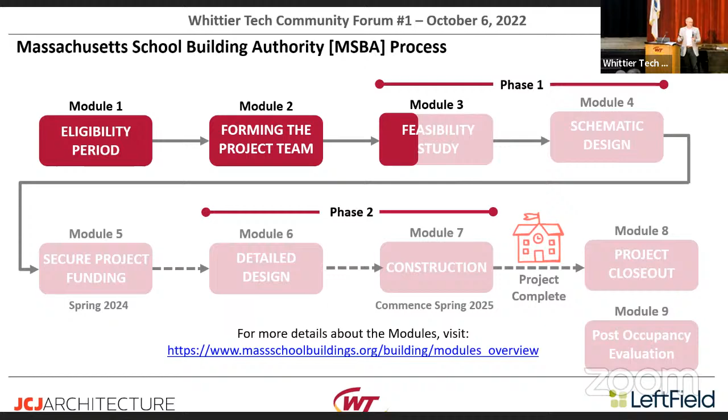From a milestone standpoint, you can see Maureen indicated that there's been 5 years of submissions, applications to the MSBA. I can tell you that some school districts have submitted 10 years of applications, some have submitted 15, and they have never been invited in. Just to be invited into the MSBA pipeline process is a gift.

The forming of the project team happened earlier this year. We are here, about 2 to 3 weeks away from submitting the preliminary design program. We will then be moving forward into the preferred schematic report, a robust schematic design. At the conclusion of the schematic design, we will know the scope, the solution, the schedule, and the cost.

And then for our third graphic, which apologies that a lot of this is very duplicative, but we know that everyone sees things through a different lens and a different vision, we wanted to show the timeline in a conventional calendar format.

So the first phase, which we are in, is the preliminary design program. We're a couple weeks away from submitting this to the MSBA. We will then move forward into focusing the solutions down to one. That will happen at the conclusion of the preferred schematic report, a robust schematic design, with approvals within the 11 member communities, and then, depending on the solution, we will work forward to breaking ground.

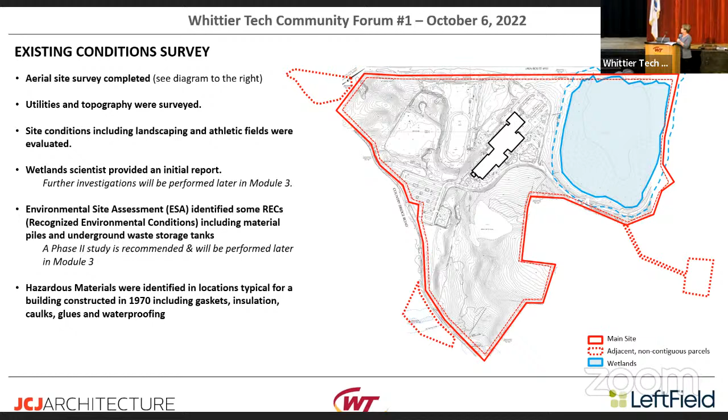So these are the plans that we developed, and these will be used as the baseline for the design options that will be talked about later in the presentation.

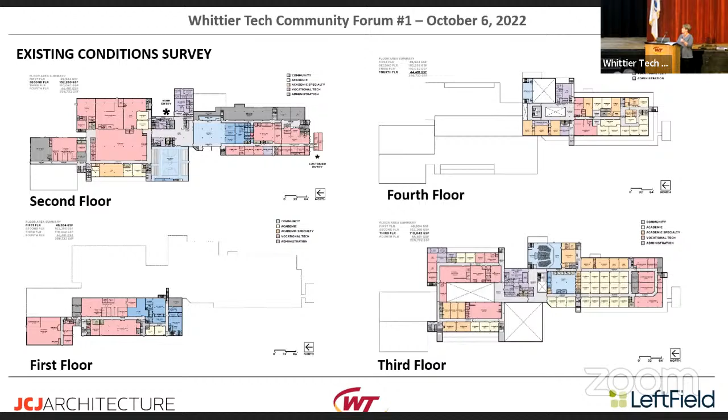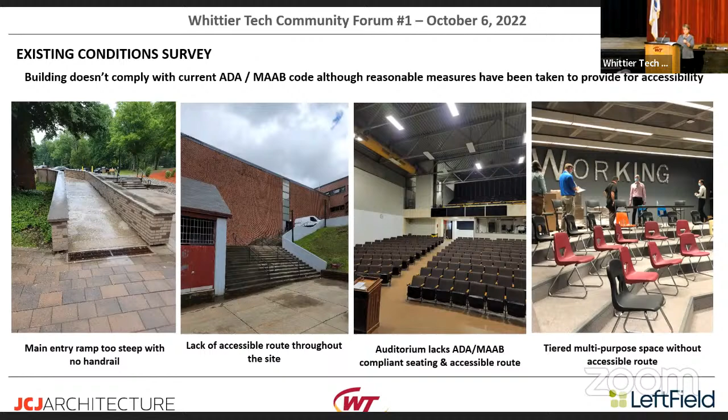The existing site and building has conditions that do not comply with current accessibility codes for either the Massachusetts Accessibility Code or the National ADA Code. In spite of that, the school has done a great job making reasonable accommodations to provide accessibility. These photos indicate some existing non-compliant conditions in both the site and the building. One of them is in this auditorium we're in right now, we don't have an accessible route or accessible seating that meets current codes.

The exterior envelope, the brick, needs repair and cleaning, and also isn't comprised of a composition that meets current energy codes. Other examples include several areas in the building comprised of connected stories without the fire separation and smoke separation required in current building codes. Another example is that the wire glass in the building is not impact resistant per current code.

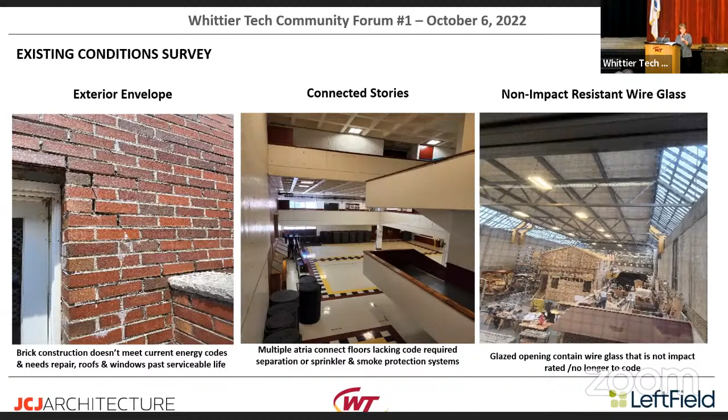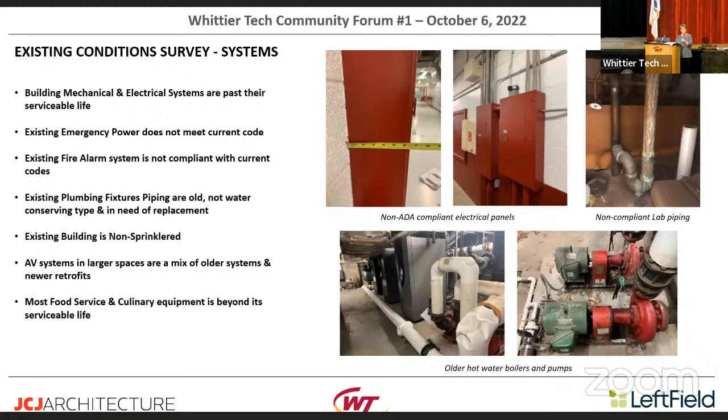There are also daylighting challenges, with many internal classrooms, both academic and vocational, lacking natural daylight. The systems here are old and tired and need replacement, the heating, plumbing, electrical, none of these meet current codes. Another big issue is the lack of a sprinkler system required under current code. Finally, besides the technical issues, these buildings don't meet the energy code and are inefficient and costly to run.

Thanks, Alicia. My name is Jim LaPosta with JCJ Architecture. I'm a design principal. We're going to spend the rest of the presentation talking about how we get from understanding the conditions here, which we've discussed, to what the vision for the future might be, and what could eventually be a new or renovated school.

As Doug mentioned, one of the things fundamental to this entire process for the MSBA is that this project, whatever is built, ultimately fulfills the educational mission of the district. So they require an educational plan.

To do an educational plan, it's important that we hold a series of listening or visioning events, which we've done over the summer. There were a series of workshops held with an educational consultant who was part of our team, David Stephen. He's a former vocational tech teacher as well as an architect.

Then we had meetings with large groups. Almost all of these were held online, as our world is nowadays. Ultimately, the last one was an in-person teacher workshop that we held here on site, just before, I think it was the day before school opened.

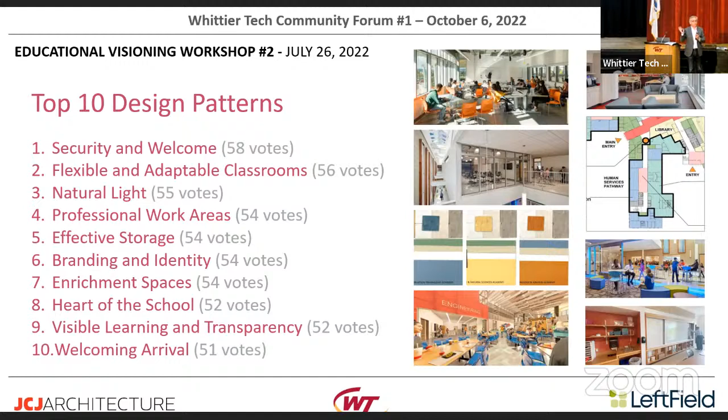So these were really the top 10 out of probably 40 or 50 different patterns that were looked at, discussed, and voted on. This isn't the final be-all and end-all, but it's a way to help inform the building design as it moves forward.

There are things that I think the best one was: we're Whittier Tech. This is a special place, and we need to hang on to what's special about Whittier Tech as we go through this process. This isn't any other building, any other place, so we need to make sure we don't lose sight of that. Thinking and doing is how students learn here.

We want to create spaces that are important in that way, that support that mission. Adaptable, flexible evolution — we talked about how education is going to change, and the new or renovated building has to accommodate that.

We want to focus on career pathways. That's what this place is all about, making sure students are career and college ready when they leave. A heart of the school we talked about — some place where, when you arrive, you feel like you've actually arrived at the building, and to give a center, like a community square for the school.

Indoor-outdoor connections — you've got a beautiful site here, lots of opportunity for outdoor learning, lots of opportunity for working outside, trades work outside. Maybe we could think about ways to enhance that learning environment using the site. And then finally, school is a community resource.

For the 11 communities that are here, how can we make sure that this building functions in a way that supports all 11 communities and gives access to and support for functions that may be needed?

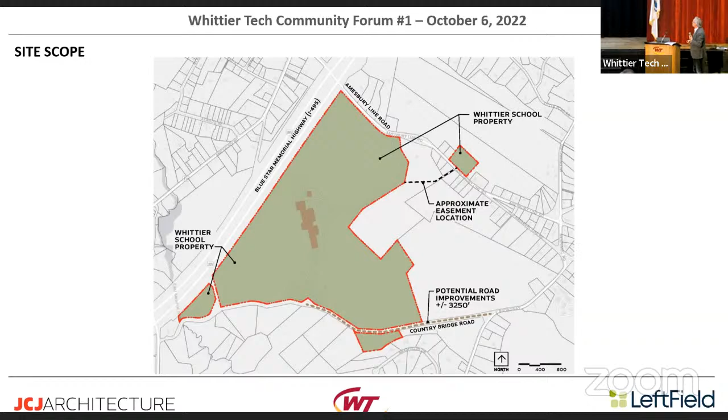All of that has to get applied to your site. So as we begin to look at that, this is the property again in terms of the site scope. It's pretty big, so you'd think there's a lot of places to build. This should be pretty easy.

But when you begin to analyze it, you find there are some limitations on the site, and that's what we're going to talk about. To start with, the way the site currently works, there are lots of traffic issues. I'm not telling you anything you don't already know if you come to the site regularly. Parking issues, traffic issues, issues of how you get in and out of the site.

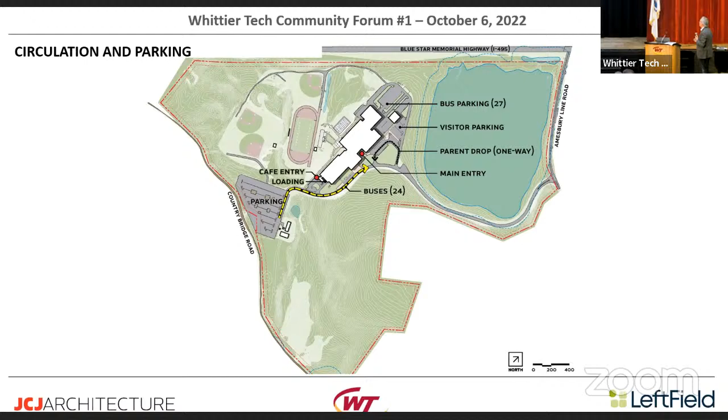But more importantly for the construction project, you've got a lot of hills here, a lot of topography. One of the things about a building project is if you can stay away from the hills, you're going to save money. So we want to analyze the most buildable sites on the campus, either for an addition or for new construction. This gives you some idea of the slope you have.

So this just gives you some idea. There's a 90-foot grade change in this part of the site, 130 feet from top to bottom. It's pretty level over where the ball fields are, relatively level where the school currently is. There's a 40-foot depression here and a 40-foot hill here. So there's lots of interesting things going on.

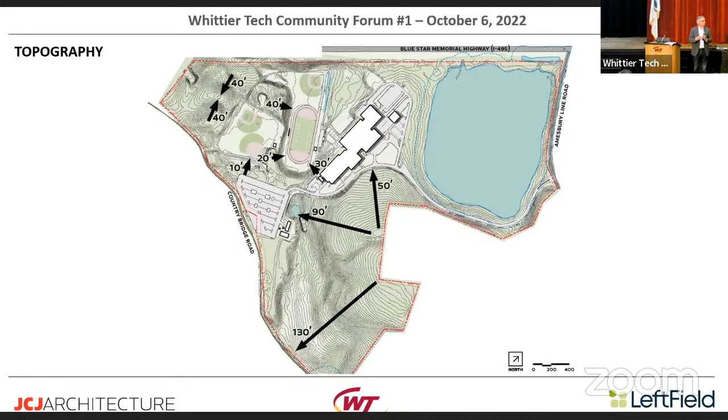We can build anywhere, but it costs money and it takes time. So how do you do this in the most efficient way so that we're maximizing the taxpayer dollars and making a really good school? So we started to look at things like buildable area.

The areas in yellow really are those areas that would be the most cost effective to build on and really the easiest to build on. The orange is somewhere in between. Everything else is either very hilly or a wetland. So while there's a lot of acreage here and it's really beautiful, there isn't necessarily a whole lot of room to put a big building and a lot of parking.

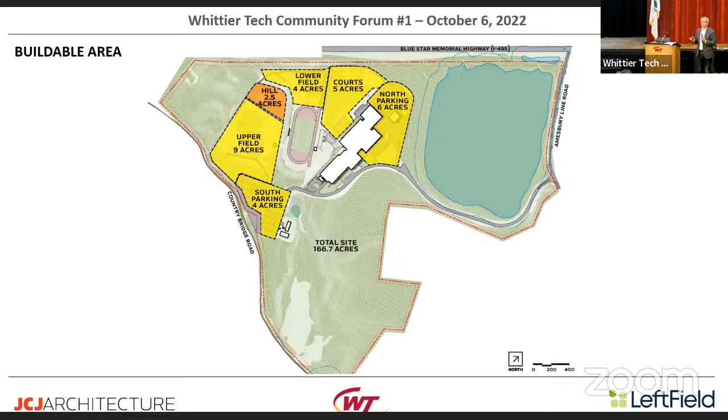So we need to make sure we look at a variety of options, and that's what this is about. As Doug talked about, the MSBA has a very good process—in fact, better than almost any other state in the country—for going through options and making sure you've uncovered everything, really evaluated all the options. Do they meet the educational program? Can they be built? What's the schedule? What are they going to cost? And then you can pick the best one that balances all of these.

So this is a matrix of the options that have been put forward initially. As David mentioned, we're starting with a lot of options. All of them are plausible and could be built, and we'll be narrowing these down eventually to a single option that would then be moved forward.

So the first option is a code upgrade. You'll see two lines here, 1,280 students and 1,400 students. When the district was invited into the program, they were asked to look at two different enrollments, so we'll be looking at two different enrollment options. At some point there'll be a decision made as to which of those two enrollments will move forward as well. So that's why there's kind of a matrix of options here.

So if you look at the code upgrade, this is simply taking this building, upgrading all the codes, fixing all the things that Alicia talked about. And at the end of the day, it will still only fit the 1,280 students—you can't squeeze 1,400 in here. That's why that box is gray, so that's not really an option if you want 1,400 students.

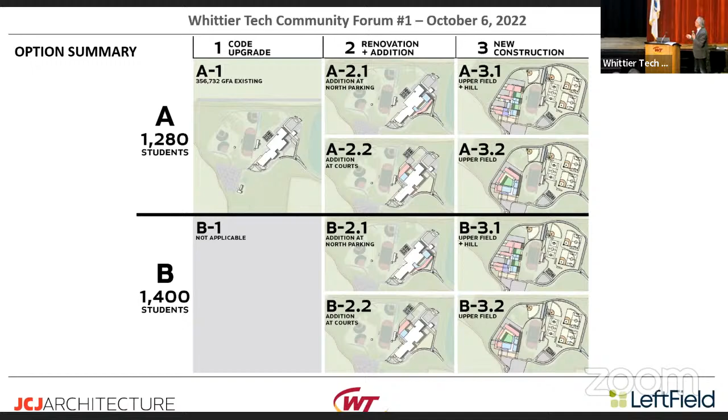You just can't fit them in the current building. When you're done, what you'll have is a code-compliant 1970s building, because you don't do anything else under this option. This is a baseline that the MSBA will be asking us to look at. Then there's a column for renovation addition—four options we'll go through in terms of where you would renovate this building and add to it in order to make it work. And then there are options for doing new construction as well.

So if we look at the first renovation addition option, what you see here on the left in all of these will be a site plan in white. That's the existing building where we are now, there's the new stadium, and the entry drive coming in from the right-hand side. On the right, this is what we call a stacking diagram, a very simple floor plan kind of exploded to show where various things might be located.

The first option for renovation addition is to build a new addition out in the front of the school. In the reddish color, you'd have a new Votech addition, a new main entry, and a new auditorium, and this existing auditorium space would be renovated into other functions. We would redo the bus drop so it comes around the right side as you drive into the site—buses to the right, parent drop off to the left. There'd be renovations to the drives and parking, and a new guard shack in this area.

Out in the back where it says future expansion—one of the things the MSBA asks us to look at is, after 50 years, where would you build the next addition? You don't want to build something now that can't ever be expanded in the future, so on all of these you'll see an area marked for future expansion. In this option, that future expansion would be off the back where the courts currently are.

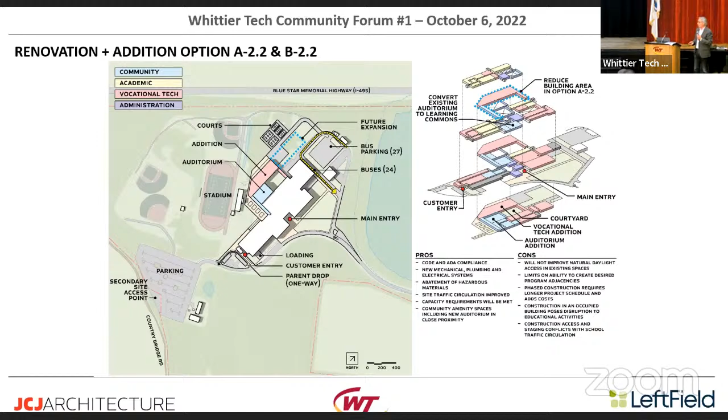The first new option to look at is to build a completely new building on the far side of the stadium—we're currently here. In this case, you would build a new either 1,280 or 1,400 student school, again with one extra floor at the front. A completely new building, all new facilities, roughly laid out with everything in a series of small courtyards that would allow for some outdoor learning and outdoor trades. You could build houses out there, do outdoor work in those courtyards, and have outdoor academics perhaps on one side.

We would, in this case, put in a new road around the school for buses, so buses would come around, be able to turn and come back out. Parents and visitors would come to the left, so you'd have a complete separation under a new scenario of buses and parents.

We would relocate all of the bus parking, bus maintenance, and storage down to more or less the southern end of the site. After the school building is built first and everyone moves from the old building to the new, the next phase of construction would be to tear down this building and build a new set of ball fields in that area.

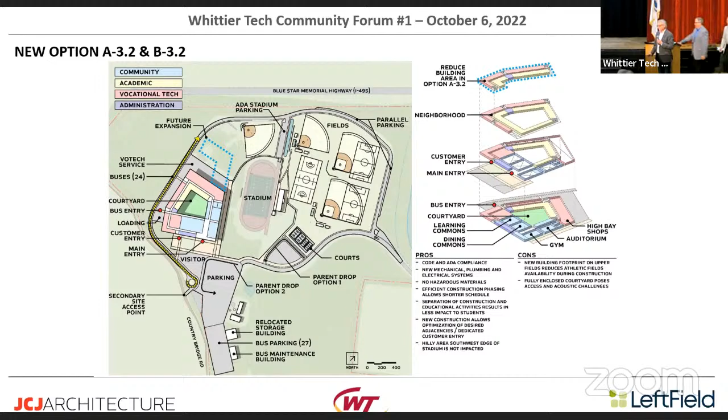Regarding carbon footprint for the building—thank you, that's a great point. I think it's extraordinarily important that the building be designed to be net zero, to have a net zero carbon footprint. The state is pushing that; there's a goal for 2050 for all buildings in the state to meet that standard. I live in West Newbury, and Pentucket just completed a new high school, and it's an extraordinary building, a great building. In my mind, the one thing that's lacking is that it's using natural gas for heat.

And because of MSBA standards regarding funding, when that building was designed and built, there wasn't an opportunity, as I understand it, to look at something like ground source heat pumps for heating.

That has to be done for a new building here. The building has to be built to future standards, to meet future energy needs. So that's... otherwise everything looks good so far, but I just felt that needs to be a baseline.

Yeah, we do have sustainability consultants on board. We will be evaluating all of those options. One of the challenges I'll just share of doing a net zero building in a vocational environment has to do with some of the programs, but it doesn't mean it can't be done. It just requires a little more thought.